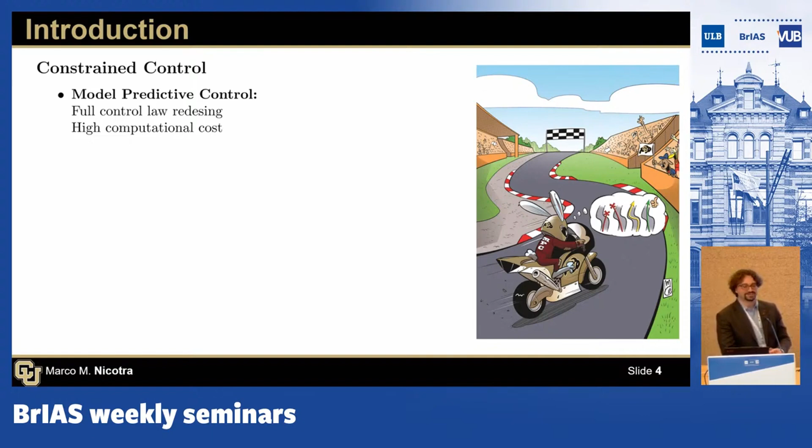So an alternative method to MPC are what are called safety filters. Safety filters are a broad family of constraint control laws where you keep an existing controller, so there's no need to go and redesign the system. A lot of industries have had their control law for years. They've tuned it to what they consider perfection, and they don't want to give it up. So the nice thing about safety filters is that they allow them to keep those control laws, and they tend to have a much lower computational cost compared to model predictive control because they don't need to solve a full nonlinear control problem.

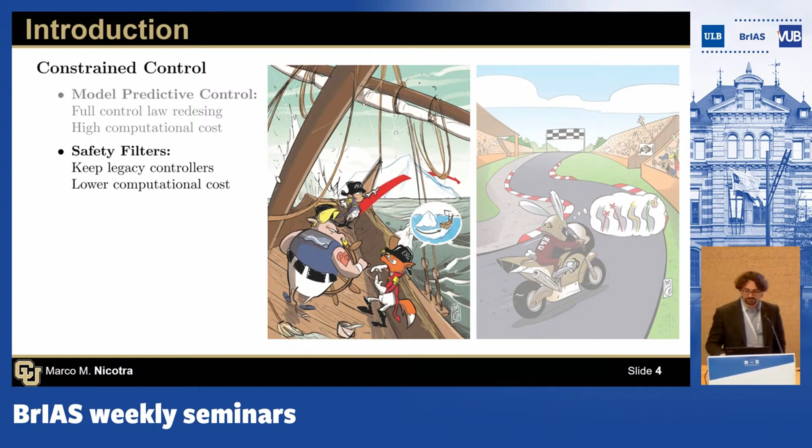I'm going to talk about a few different families of safety filters. The general idea is that first you design the control law for the unconstrained system, so you ignore constraints, design your controller, and then you introduce an add-on unit that enforces constraints a posteriori.

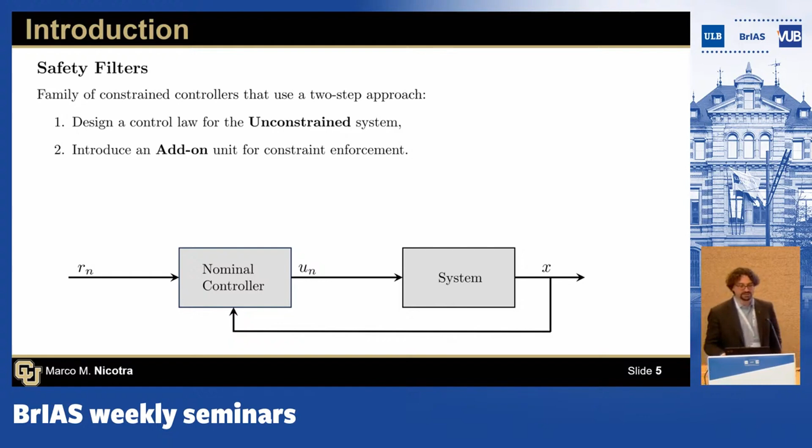Different kinds of safety filters will depend on where you place it. So control barrier functions are going to be a safety filter that is placed between your controller and your system, and so it filters the control input that goes to the system itself.

Whereas reference governors is instead a safety filter that is put on the reference of your control law. So in one case, you filter the reference and you allow your nominal controller to do its job. In the other case, you interrupt what the nominal controller is doing and modify the control law.

I'll briefly go through the general idea of both control barrier functions and reference governors, and then I will show how to mix the two to develop control barrier functions.

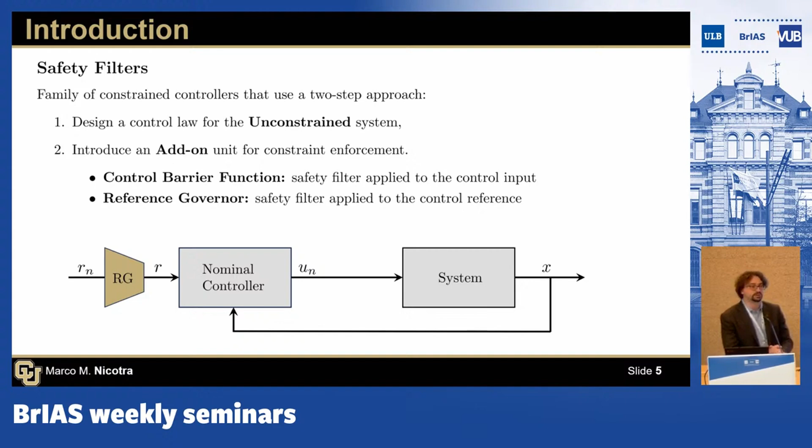Brief history on control barrier functions. They're actually relatively recent in terms of control schemes and control literature. The oldest paper that talks about control barrier functions in what is their modern conception is from 2014, but really the literature exploded around 2019. So we're talking about 5 years of control barrier functions being used and researched on.

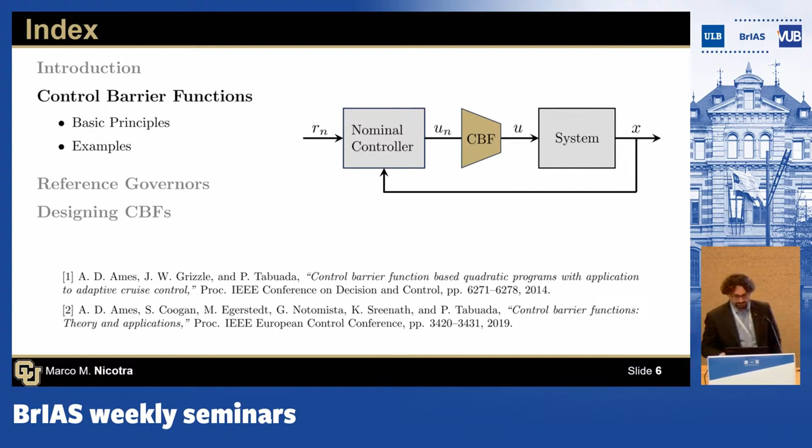So what are they all about? Well, we consider an affine continuous system, so the input enters your system linearly for a fixed x. And then we have state and input constraints, mathcal X, mathcal U. Our objective is to control the system while making sure that these constraints are satisfied.

And then there's a definition of a control barrier function that's just about as useful as the definition of a Lyapunov function. A continuously differentiable function h is a control barrier function if it satisfies two properties.

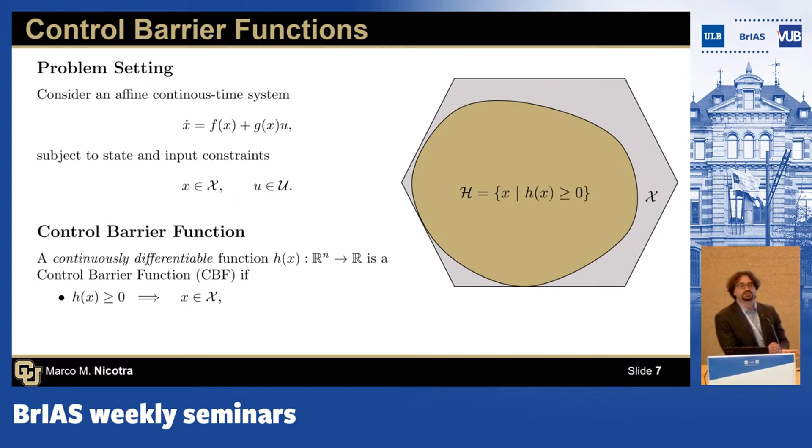First of all, if h of x is positive, then my state needs to be inside the constraints. It doesn't say anything about h being negative, violating constraints, that doesn't matter. But the point is, if it's greater or equal than 0, your constraints are satisfied.

And then the other requirement for control barrier functions is this: if h is positive, there exists a control admissible u that satisfies a long and ugly equation. So let's see what that means.

You have this nabla h, the gradient of your control barrier function. Let's put ourselves on the boundary of where h is equal to 0. Then the gradient is nothing else but the direction that points into my 0 level set.

And the second part of this is nothing more than x dot. So we're basically saying that the inner product between the direction in which h increases, so the direction where I go into my constraints, needs to be positive if h is 0.

And so here we have two cases. There's an x dot that points outside, and that's not allowed. There's an x dot that points inside, and that is perfectly allowed.

And then the question is, okay, why do we need this alpha of h on the right? Well, if we didn't have alpha of h, we could set this as sort of a subtangentiality condition, where you only care about what happens on the border, and then inside you say, okay, do whatever you want.

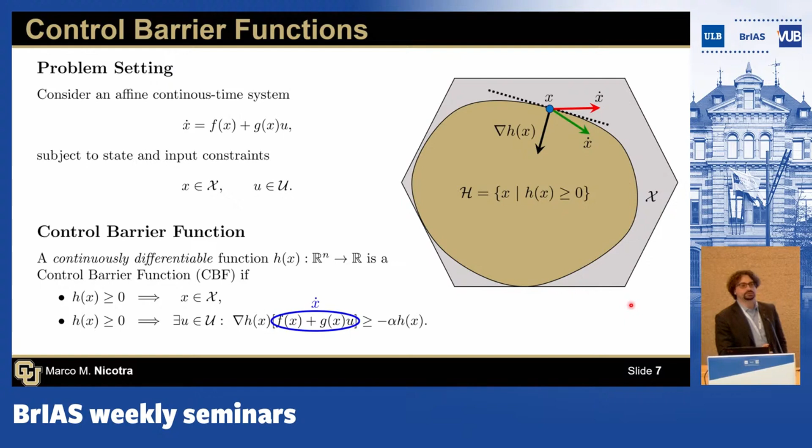And as I said, this is a very general definition of h of x, and it says if you satisfy these conditions, you have a control barrier function. And what do we do with this control barrier function?

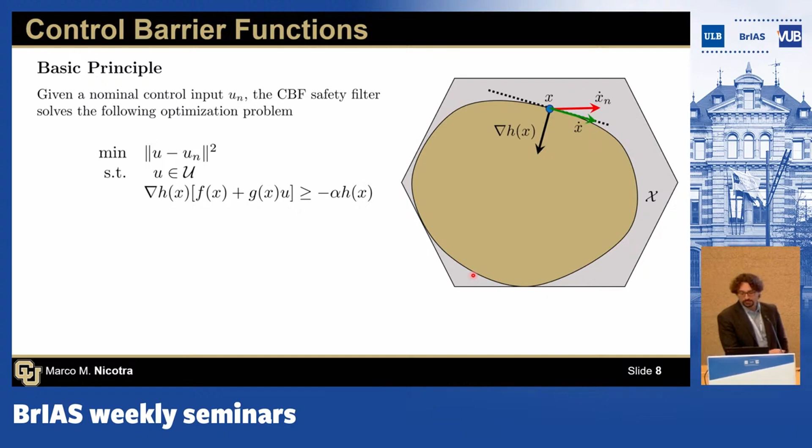And at every, well this is in continuous time, so we continuously solve this optimization problem, and we are guaranteed to be inside the constraints. So once again, if h of x is a CBF and its initial value is positive, then this optimization problem is always feasible. So it starts feasible, will always remain feasible in the future, and our control law ensures that constraints are satisfied. So this is the general pitch behind control barrier functions.

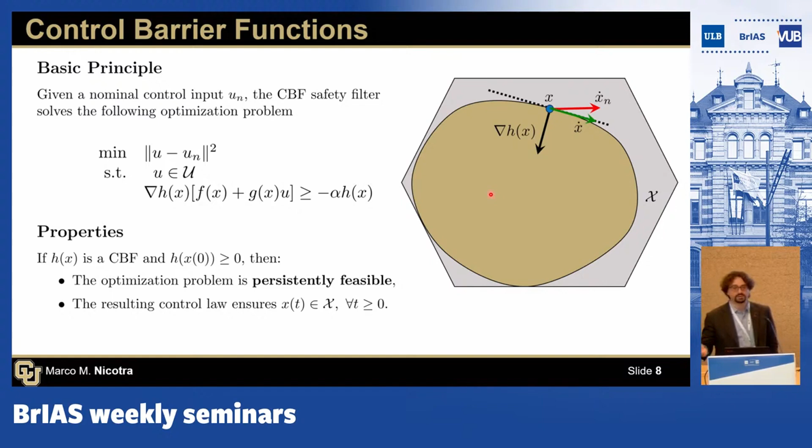And the truth is that they work pretty well, and they've been adapted for robotics quite a bit. So I'm going to go over a few examples of how control barrier functions work, how they can be implemented, and then what the pitfalls are.

Here we're going to have a simple obstacle avoidance problem. We're on a plane. X and u are both two-dimensional vectors, so we can move this point mass in whatever direction we want. We want to reach our reference, which is on the other side of the obstacle, while staying outside of a circular obstacle. So first, we design a nominal controller: proportional gain times r minus x. This control law would normally just go on the straight line between your initial condition and the reference.

Then, the biggest issue with control barrier functions is that we need to find a control barrier function for the system. And this is where people have problems, because there's no systematic way of generating control barrier functions. So typically people just propose candidate CBFs and sort of hope for the best that the properties are satisfied.

In this case, we can take a CBF as the distance between my current state and the constraints. This is basically the constraint: x transpose x minus 1 — if that's equal to 0, it means the norm of x is 1, and if that is positive, it means we're satisfying the constraints. So in a way, we take the constraint itself and say I'm going to use that as a control barrier function.

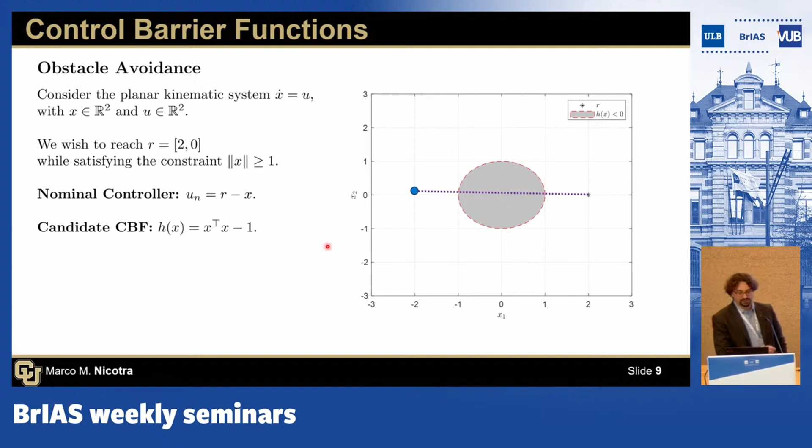And in this case, it does satisfy the properties — you can prove it. But in general, it might not.

And then the CBF filter looks nothing more than this: minimize the error between your control input and the nominal control input, subject to the derivative of the CBF being greater or equal than the value of the CBF times some scalar alpha. You solve this optimization problem, and you get a trajectory that goes around the obstacle and to the reference.

So I'll say that the one thing about CBFs, and I think the reason why CBFs have become so popular, is the fact that they are extremely intuitive and very easy to implement. You propose these things, and you have an optimization problem where the dimension is just the size of your input, as opposed to MPC, which also has the dimension of your state, dimension of your prediction horizon, etc. So this is a very light optimization problem, very simple to solve online, and you can get very good results without doing too much.

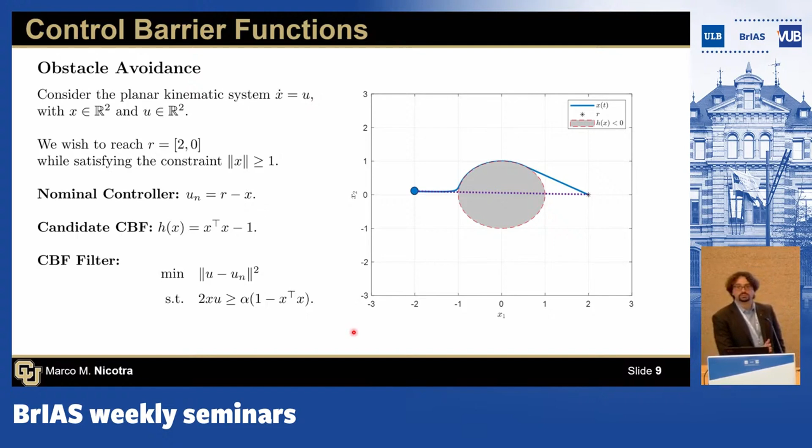All right, a slightly more interesting problem. These are two carts connected by a spring. You can do the same exact thing with an overhead crane — it's just a bit more annoying to get all the other parameters, so I'll keep it simple. But for those of you who are fans of overhead cranes, we have everything for that too.

Basically, we have these two carts of two different masses. They're connected by a spring, and the control input acts on the first cart. We're going to have a constraint on the second cart, and we also have a maximum input saturation constraint as well.

Now we go through the various steps of designing a CBF. We choose a nominal controller, which is a PD controller on the first cart. And if we implement that controller without changing anything, this is the behavior that our system will do.

I'm only plotting x2. You see that x2 goes over the constraint, and then the control input also hits saturation here and here. So the nominal controller was designed without taking into account constraints, and so it shouldn't be surprising that it violates them.

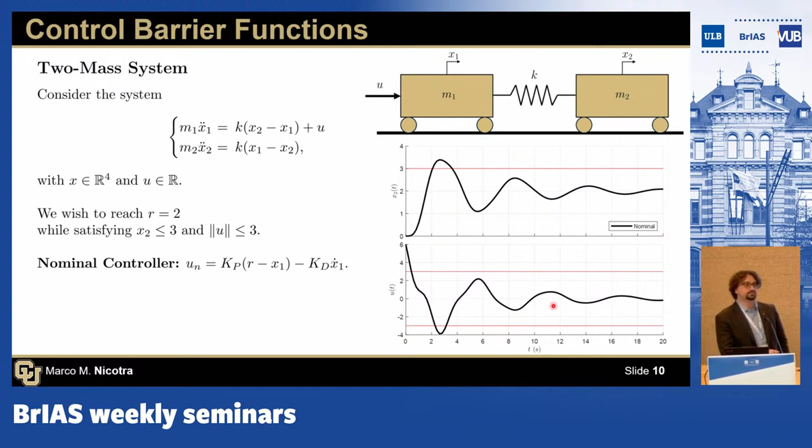And then once again, we need a CBF. As a candidate CBF, we're just going to take 3 minus x2, because I want x2 to be smaller than 3. And once again, I'll stress this is a candidate CBF — it means it satisfies the first property, that if it's positive, constraints are satisfied, but it might not satisfy the second property.

One thing I'll note is that when we compute the derivative of h, it's minus x2 dot, which doesn't depend on the control input. So already we've seen that if the affine system doesn't have a way for the control input to act on the system, then we're already in trouble — we can't use the CBF. Not to fear, this problem has been solved.

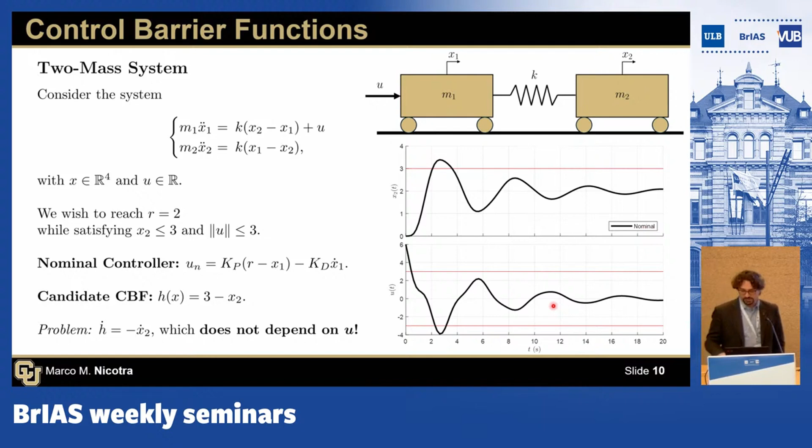So there's the exponential CBF approach, where basically you compute the derivative of your CBF until the control input comes in. If you think about it, this is a fourth order system where the control input influences the acceleration of this mass, and then the position of this mass influences the acceleration of the second mass. So there's a relative degree 4 before you see the control input acting on your system, and there's a slightly more complicated formulation for control barrier function that takes into account relative degree.

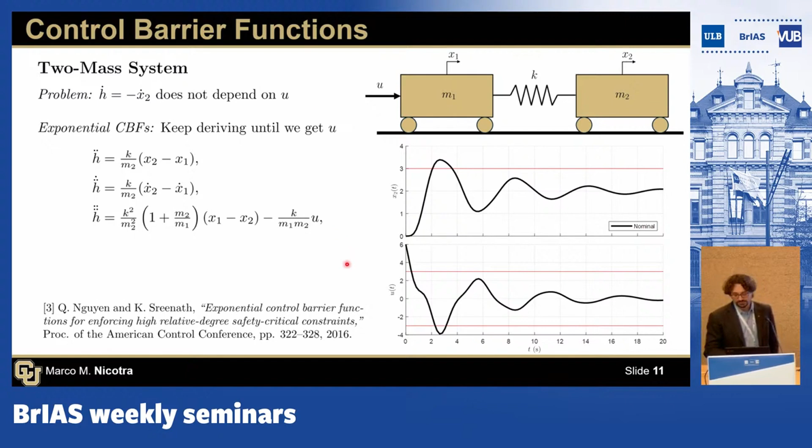And if you implement the CBF there, you get a control law that filters out what the control input should have been. And we get something that satisfies our input constraints and also satisfies our position constraints.

Great story. And I would say this is the reason why everybody goes to CBFs, is that it is very simple to implement. Unfortunately, we have no guarantees that the candidate CBF we chose is actually a CBF.

In particular, what happens is that for different initial conditions, we might have constraint violation. For example, for initial conditions at minus 13, we see that the carts go towards the constraints, and then the control input goes from an upper saturation, getting close to the constraints, you need to decelerate quickly, and you have a lower bound on your control input. So what happens here is that the CBF has put itself in a condition where it can't decelerate fast enough to avoid violating the constraints. So it either violates your position constraint or violates the control input constraint. It can't satisfy both, and it just fails.

Yes, with tuning, you can get it to work on this particular example, but then you can take another initial condition and violate it anyways. So the point is, sure, it works, and if you are in a confined space, you can tune it in a way that everything works. But we want something that's a bit more systematic than just taking distance to constraint and tuning things until they work.

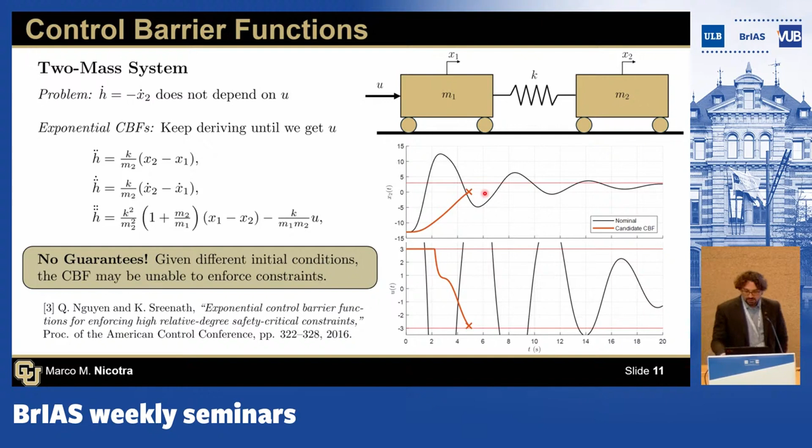Which brings us back to a different literature, which is reference governors. Reference governors, Manuel might correct me on this, but I think they were first formulated around 1995, slightly earlier for invariant sets, but this is the first time I saw the word reference governor. In any case, 30 plus years of history, and there are proven stability and safety results for it.

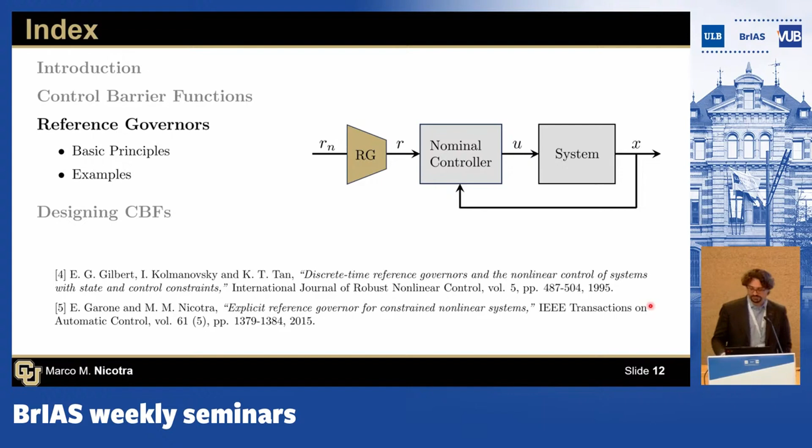And then there is this paper from 2015 that you might recognize the authors of. This is the work that I did while I was a PhD student here. Basically, we formulated the reference governor for continuous time systems, and we use nonlinear systems theory to enforce constraints. So I'm going to go a little bit into the theory of explicit reference governors because it's going to be needed afterwards.

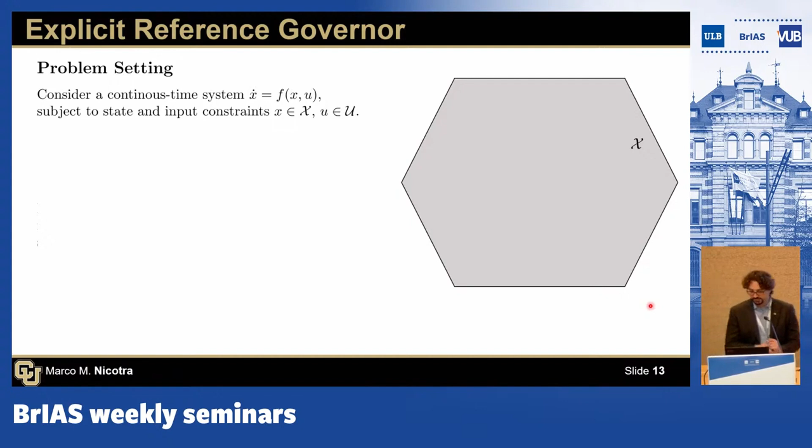Kind of the same setting. We have x dot equals f of x, u, not necessarily affine, but this is more general. Again, we have state and input constraints. And for this particular system, we are going to parameterize the equilibrium manifold. So we assume that this system has multiple possible equilibrium points, and those equilibrium points can be parameterized by this variable v. And x bar of v is a possible equilibrium point for the system.

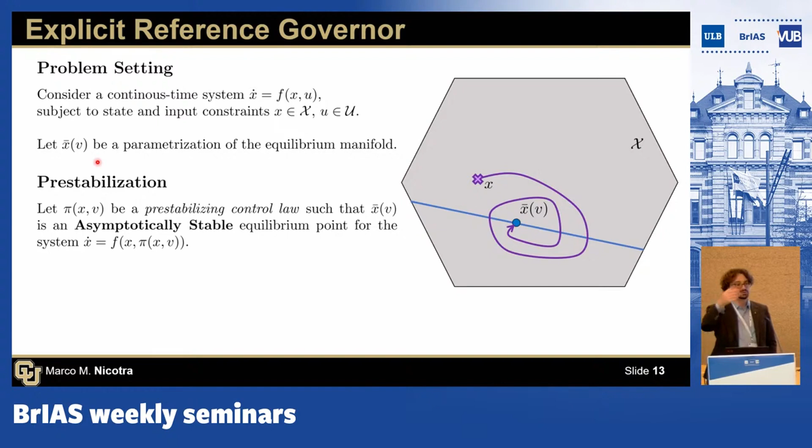Well, if we have a possible equilibrium point, we can design a control law that brings our system from x to an equilibrium point, and we call that a pre-stabilizing control law. So we start from a state x, and the pre-stabilizing controller leads me to my target equilibrium point. The nice thing is that if we have input constraints, those input constraints can be translated into state constraints, because now we have a pre-stabilizing controller, so we have a mapping that goes from state to input, and that allows us to reformulate our input constraints as state constraints.

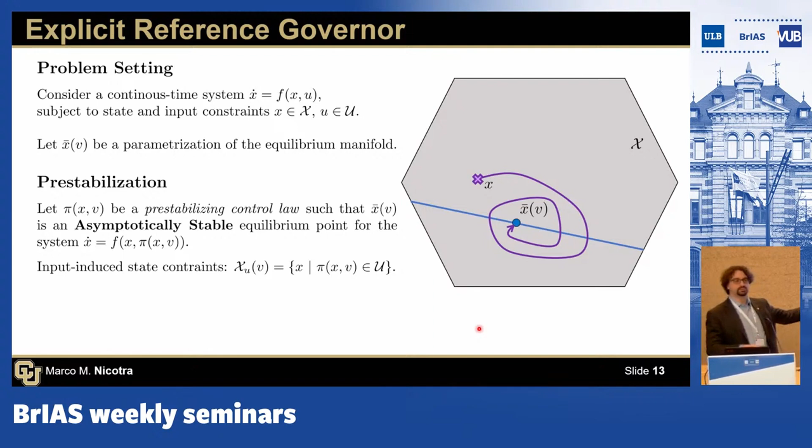And then how do we know whether the trajectory is going to violate constraints? Because right now we're not enforcing anything. Well, we can always say that the trajectory is contained inside the level sets of a Lyapunov function. Here I don't care necessarily what the trajectory will do. I just note that there's a Lyapunov function associated to my current state. And there is a Lyapunov level set that is going to touch my constraint.

So if you think about it this way, gamma of v is a distance between my reference and the boundary of my constraints, but sort of using the Lyapunov function as a norm. So we're saying, okay, for this given reference v, what is the largest Lyapunov level set that I can have that doesn't go outside of the constraints? And it's fairly clear that if the value of the Lyapunov function is smaller than the Lyapunov threshold value, then you cannot violate constraints, because the Lyapunov function is destined to decrease, gamma stays the same, and so this value is going to increase as long as v remains constant.

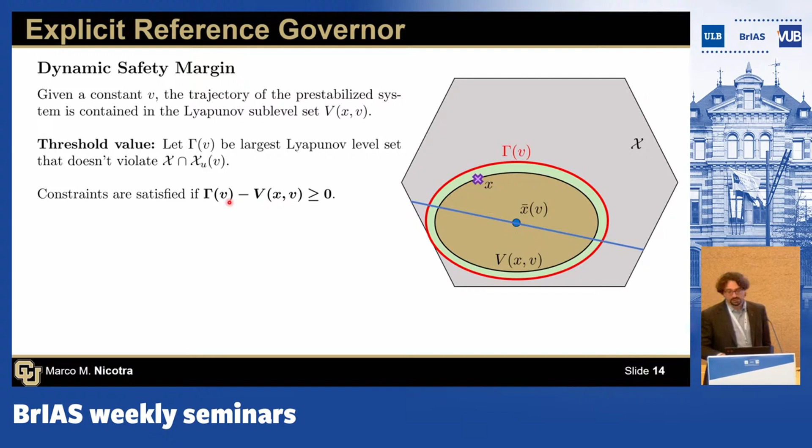So that brings us to what the ERG looks like. The ERG, we manipulate this auxiliary reference V because that might not be the equilibrium we want to go to. So we say V dot is proportional to this error. When the Lyapunov function equals the threshold value, we stop and wait for the Lyapunov function to decrease.

When it's strictly positive, it means it's safe for my reference to move. This rho is the direction in which I want my reference to move. Where should it go? Ideally we have an actual reference we want to go to. So rho is just a vector that points from my current virtual reference to my actual target.

And we can show that by simply manipulating the derivative of this fake reference, we can get a control law that guarantees safety and asymptotic stability.

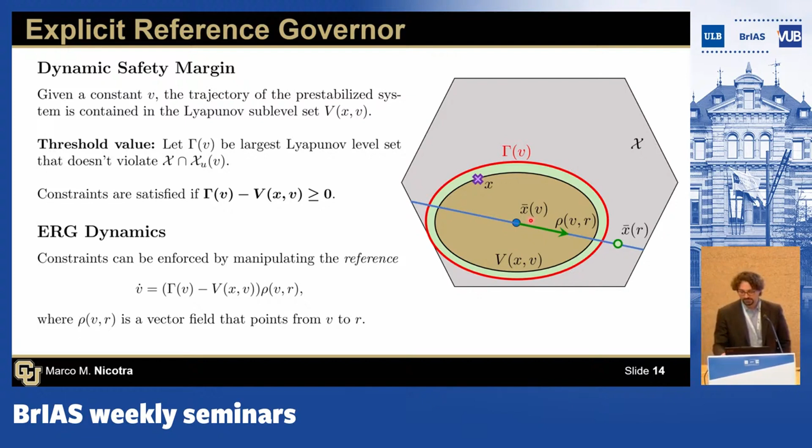So what does this look like for our example? Once again, nominal controller, PD control law on the position of the first cart. And what is the Lyapunov function for this? It is the total energy of the two-cart system, where we also assume that this Kp is a virtual spring. So the Lyapunov function is the kinetic energy of the first cart, kinetic energy of the second cart, a spring connecting the two carts, and then this virtual spring connecting x1 to my reference V. So I know that if V stays constant, this function is time decreasing.

Now I need to express my constraints as constraints on the Lyapunov function, not constraints on the state. I'll skip over this. The first one is our input constraint.

Your control law is a linear constraint, your Lyapunov function is an ellipsoid. You can calculate the intersection between an ellipsoid and a planar constraint, and this is the result for it. It's not too exciting, but the solution is there, and you can calculate it closed form.

A little bit more interesting is the second constraint. This is the constraint associated with wanting x2 to be smaller than 3. What happens here is I have a system with a reference V and a virtual spring Kp that connects the reference V to mass 1. Then I have a real spring that connects mass 1 to mass 2. So mass 2 sees a series of two springs that connects it to V.

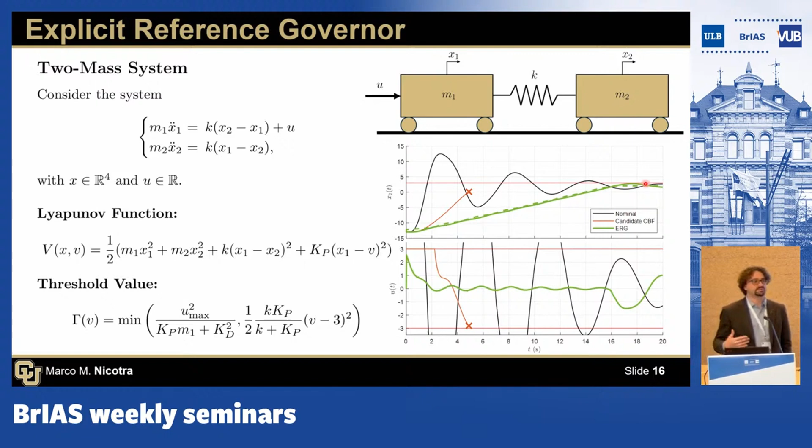The idea here is, well, we have CBFs that have been shown to achieve fairly good performance when they work, but don't have guarantees that they will work. And then we have the ERG, which has guarantees that it will guarantee safety, but the performance tends to be hit or miss. So I can finally get to the main focus of this talk, which is how do we combine reference governors and CBFs so we can design a CBF that is guaranteed to enforce constraints.

The results I'm presenting are from a paper that has been submitted to TAC. And if you're a reviewer, please accept it.

Just wanted to give you a little sneak peek at this result that I'm very excited about.

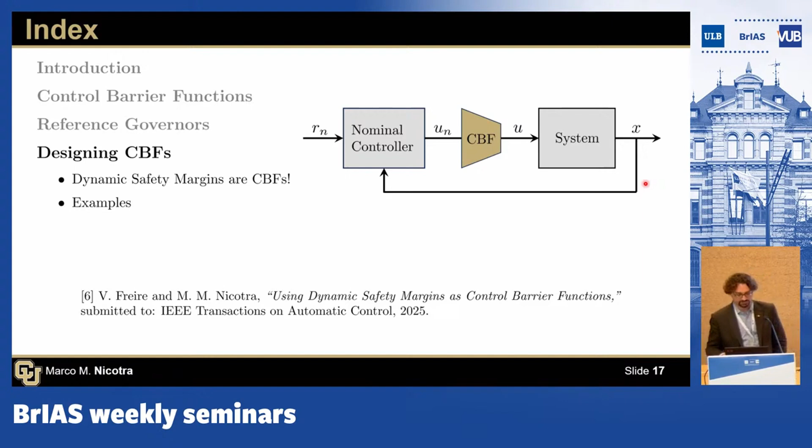Going back to the context, we need to take the most restrictive of the two between CBFs and ERG. So we're back to that affine dynamics. It's not a general f of x,u, it's just f of x plus g(x) of u. The main reason for this is to guarantee that the solution of your optimization problem is Lipschitz continuous.

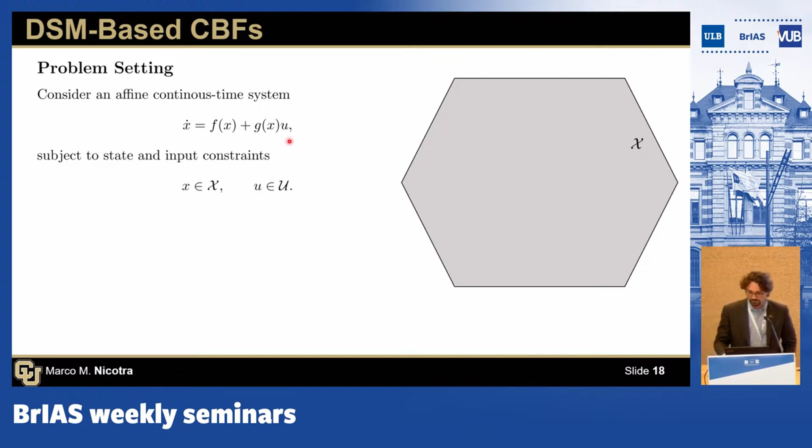Since we've done our homework on the reference governor side, we know that we can define this dynamic safety margin, which is nothing more than the threshold value for a given reference v minus the current value of the Lyapunov function for that particular reference v.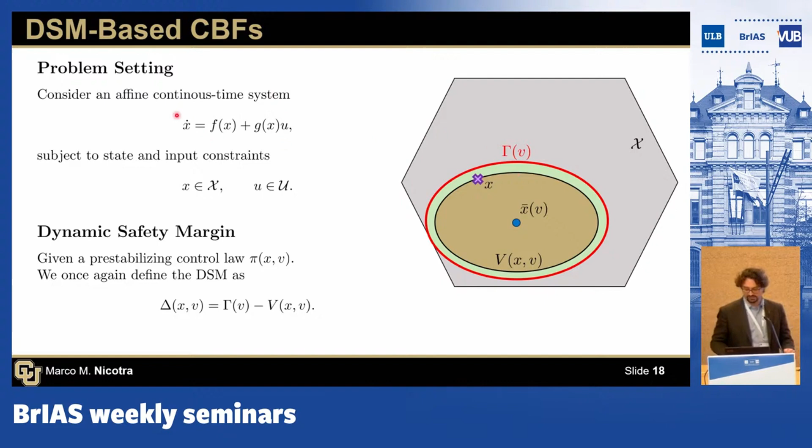What we are going to do is extend the system. So rather than studying just the dynamics of x dot, we're going to study the dynamics of my system and this virtual reference. The system satisfies my normal dynamics. The virtual reference, its derivative is equal to rho, because I get to choose the derivative to be however I want. And what we're going to do is apply the CBF optimization problem to this extended system, which is state and virtual input.

And so the optimization problem looks something like this. You need now a nominal direction for your reference to go, but that's not too hard to get. So we are solving over u and rho, and we're trying to minimize the error between our control input and the nominal control input, as before, and then possibly the error between the direction in which our applied reference goes and a nominal direction.

This epsilon can technically be 0, but when it's 0, the problem's not strongly convex. So we do like to keep it small but non-zero. But the theory works even if this is 0.

Rest of the constraints: the control input needs to be inside my input constraints. And then this is nothing more than what we had before—the gradient of delta times x dot plus the gradient with respect to v times v dot, and that's greater or equal than minus alpha times delta.

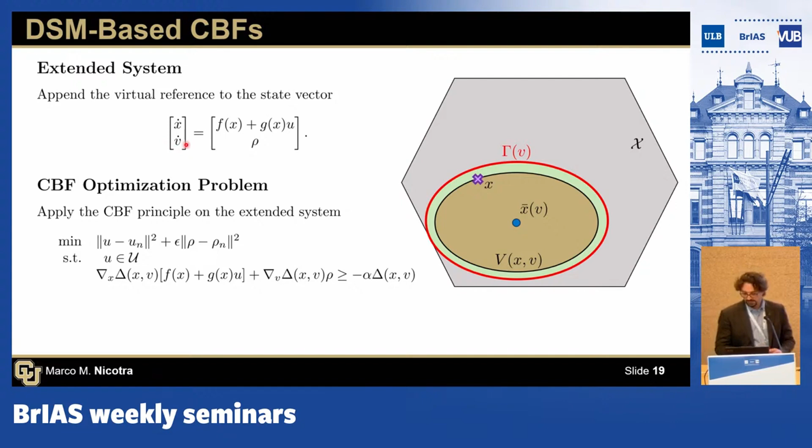So what we're doing is using this dynamic safety margin as a control barrier function for a system that has extra states in the form of this applied reference. The nice thing is that this particular optimization problem always has a feasible solution. That solution is: don't do anything with the reference, keep it still, and apply the pre-stabilizing controller to your system. If that happens, your x will follow that predetermined trajectory, which means v will decrease, which means everything will work.

Nice thing here, we don't care about relative degree of our system. Basically, if for any point we have one of these go to 0, we can actually prove that the natural dynamics of our closed loop system work.

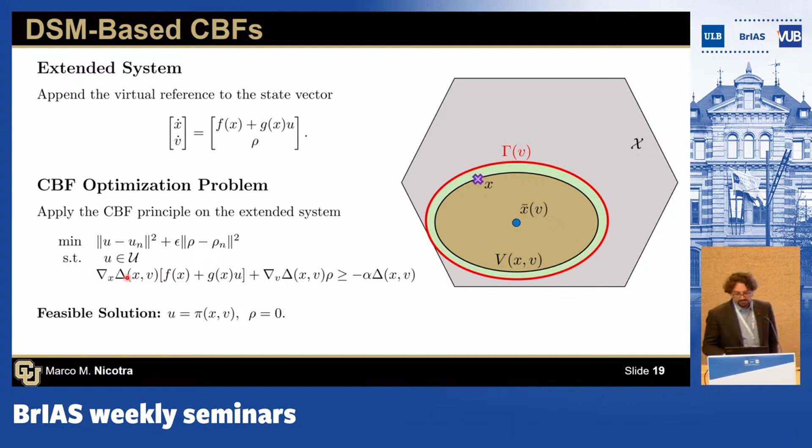Okay, so that's the optimization problem. Going back to our favorite example, same Lyapunov function, same threshold value. The point of this is to say that everything that we've learned how to do on explicit reference governors can be ported into the CBF literature with no changes.

And then once we apply the CBF, we get something like this. Here, the measure of performance of a CBF, due to how the optimization problem is formulated, is how closely it follows the nominal trajectory. You can see that the dynamic safety margin-based CBF follows the nominal trajectory pretty closely, and then also stabilizes and doesn't violate constraints.

The interesting thing to look at here is this applied reference, which isn't applied to anything—it's just a backup reference for our control law. The controller knows at this time that if it were to give a reference that's very far away from the constraints, then it's safe. So it keeps in its pocket this knowledge that it is safe now, because at any given time it can give a reference that's way back there, and by doing that it's going to satisfy its constraints.

And then we apply it to the longer step, and we get something that looks like this. It's actually doing almost exactly what the candidate CBF wanted to do. So input is fully saturated at the beginning, and the interesting part is that it saturates a little bit longer after.

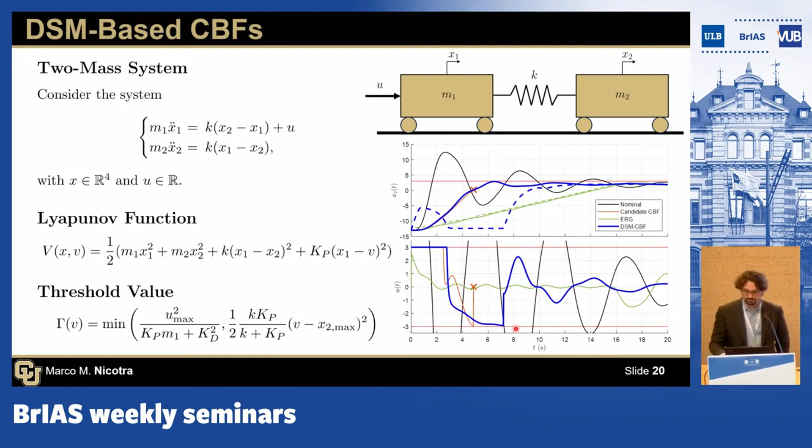Brief overlook of what we've seen. We're proposing a method to design CBFs in a systematic manner.

The steps for this: you take your system and first define a pre-stabilizing controller that stabilizes it to a generic reference, any steady state admissible equilibrium point.

It's interesting to note, and we've used this quite a lot, that the pre-stabilizing control law doesn't need to be the same as the nominal controller that we then optimize against. In fact, we've seen that the best performance is obtained by having a very aggressive nominal controller, but a very slow and relaxed pre-stabilizing controller.

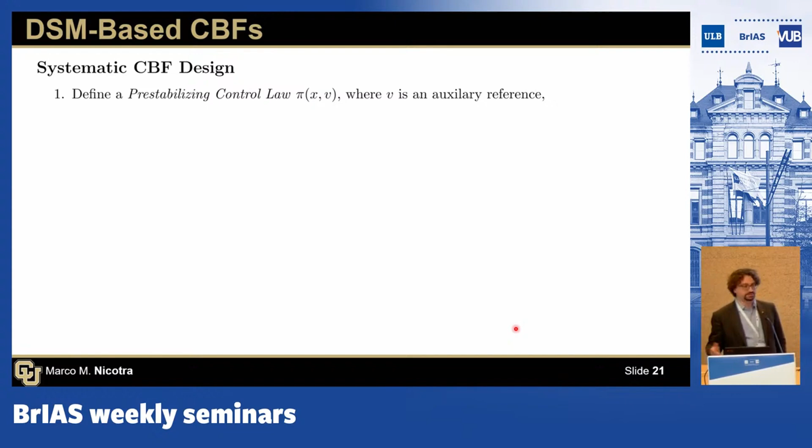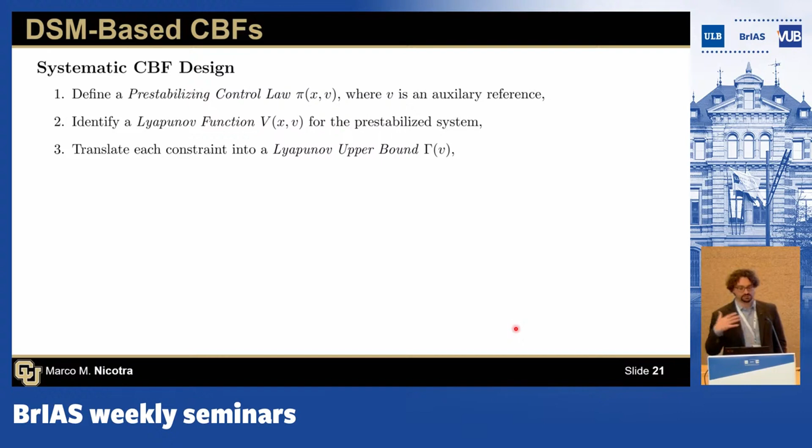Once you've defined the pre-stabilizing controller, you need to find the Lyapunov function for the pre-stabilized system, and translate every constraint into a constraint on the Lyapunov function. We've proven that the difference between the threshold value and the Lyapunov function is a control barrier function.

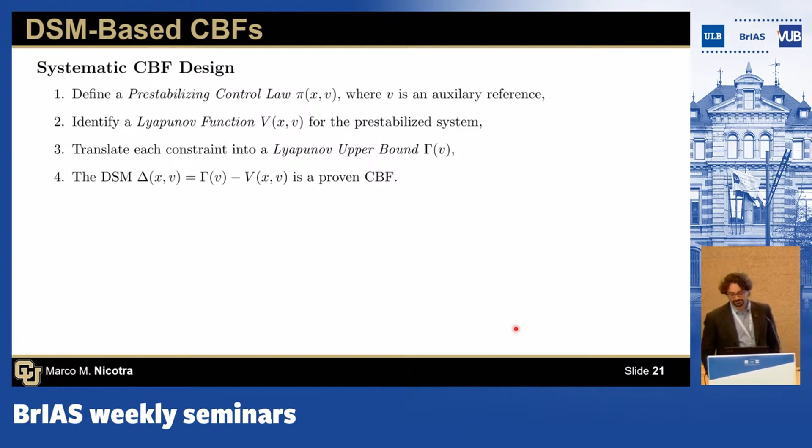Properties that we've been able to prove: the optimization problem is persistently feasible. The relative degree doesn't matter, which is nice for people who have worked in control barrier functions, because most of the literature assumes relative degree 1, and then you need to go into exponential CBFs for anything higher than that. Here we're saying it doesn't matter, it works, because basically this gamma minus v will always have a relative degree 1. And then it satisfies constraint sharing properties.

So far I've only talked about having one constraint, but if you have multiple constraints, your optimization problem becomes more complicated and it becomes more likely that the solution doesn't exist. For CBFs, we can prove that as long as you use the same pre-stabilizing controller to compute all your dynamic safety margins, then you have the constraint sharing property, and you can add constraints without any worries.

I do have time, I think. Do I?

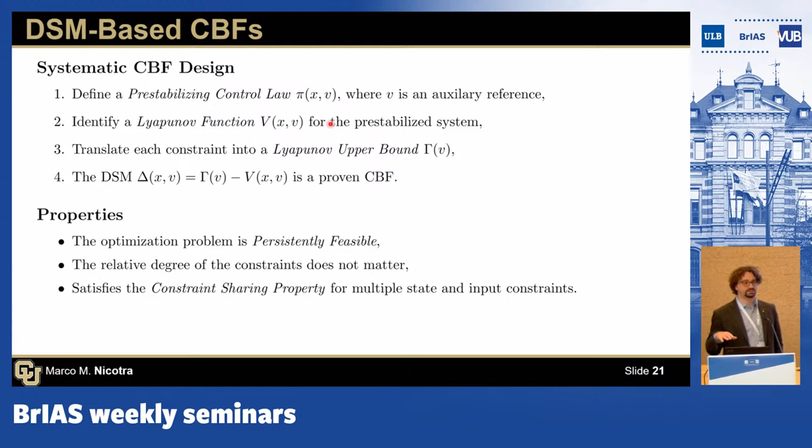So I'll go into another example where I wanted to show that the fault for the constraint violation wasn't that the relative degree was so high. So I have a system with relative degree 1, you technically have enough control authority to get everything to work, and CBFs can still fail if they're poorly designed.

So I have this nonlinear system where the first order terms are asymptotically stable, but then I have an unstable cubic term. So what this means is that if I stay close to the origin, the system tends to come back. And if I get far enough from the origin, the cubic terms will overpower the linear terms and the system goes unstable.

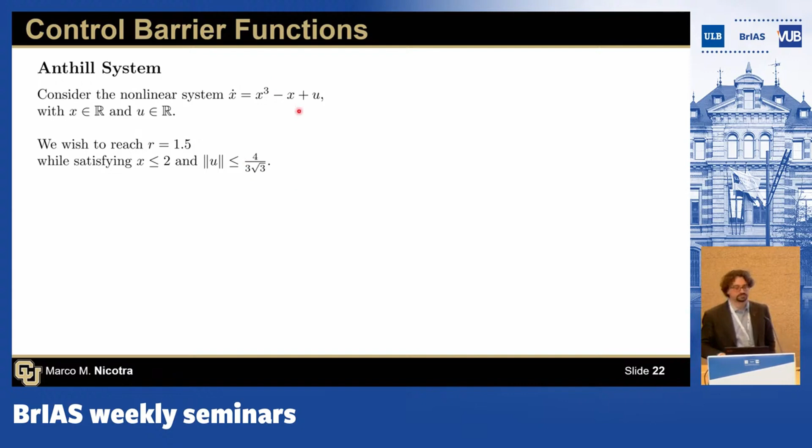And here we want to reach r equals 1.5 while satisfying constraints on x and input constraints on u. These are chosen weirdly because that helps me solve the cubic plot, but it doesn't really matter.

We define a nominal controller. Here we're doing what in robotics would be called anti-gravity compensation. So we're just computing what our steady state would be and enforcing a control input that is a constant plus something that multiplies my error.

And with this controller, we get something like this. So we go from 0.5 to 1.5 without any overshoot. So the x constraint is not even a question. And our control input definitely violates our saturation constraints.

With the CBF filter, we're going to use our constraint as a control candidate CBF, and the system looks like this. So what happens is that it tries to go towards its target. And at a certain point, when the control input saturates, unfortunately the cubic term is overpowering both the linear term and the saturated input. And so the system goes unstable.

The interesting part here is that it doesn't really matter what my x constraint is. As long as I have a constraint, it will be violated. If I had a constraint x less than or equal to 200, it would also be violated. Basically, we've excited an instability of the system, and now whatever our constraint is, we can't satisfy it.

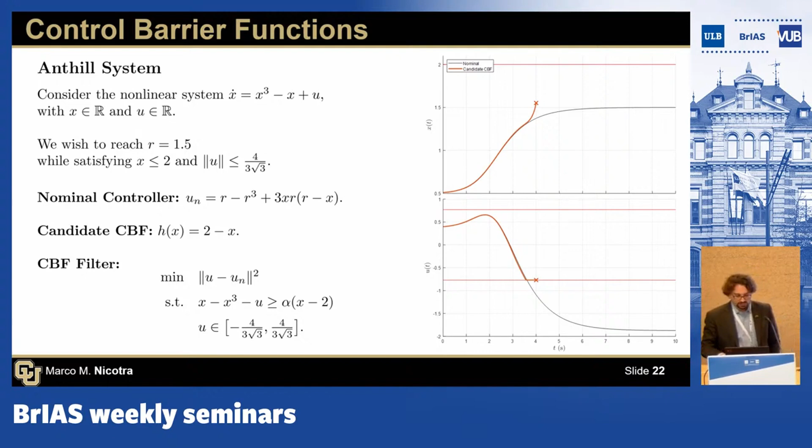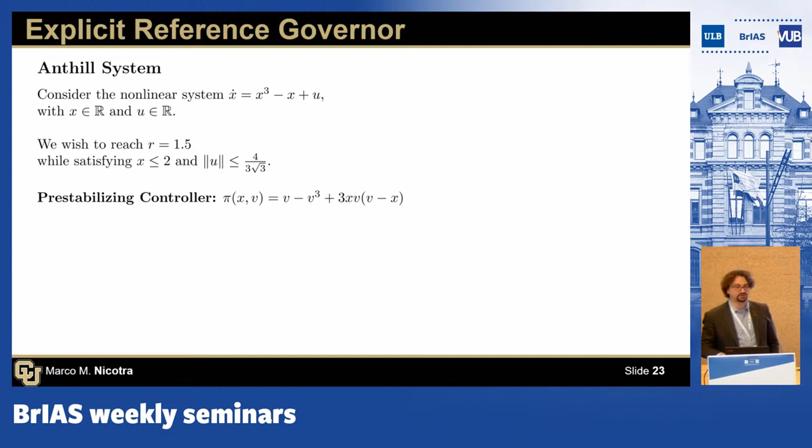We can implement an explicit reference governor, usual things, pre-stabilizing controller. This is why I call it the anthill system, because the Lyapunov function looks like an anthill.

You see you have two peaks, and basically if you're on the outside of these peaks, you become unstable. If you're on the inside of these peaks, your control is asymptotically stable. So we have a natural constraint on our pre-stabilizing system, which is that we want the Lyapunov function to be less than the value at that peak. And if we enforce that, we guarantee that our pre-stabilizing controller is always stable.

And then if we have other constraints, for example, I want x to be greater than or equal to 0, then we can take the value of the Lyapunov function at that point, and we get a threshold value.

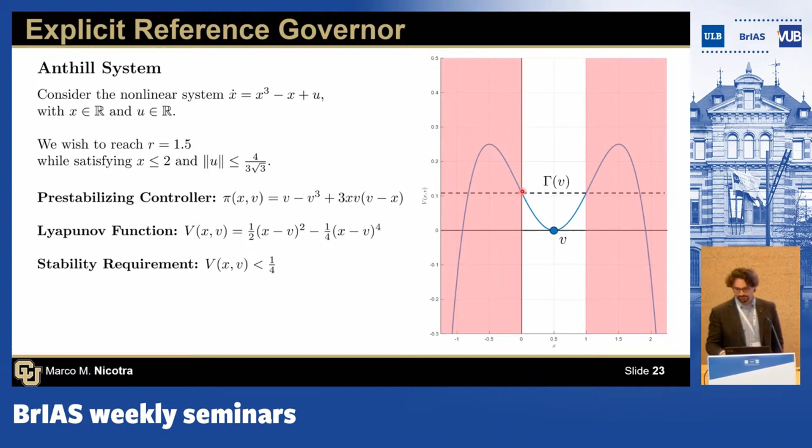So we translate everything into constraints. I'll skip over, but basically the idea is that this is what the ERG comes out to be, and we can compute the threshold value in closed form.

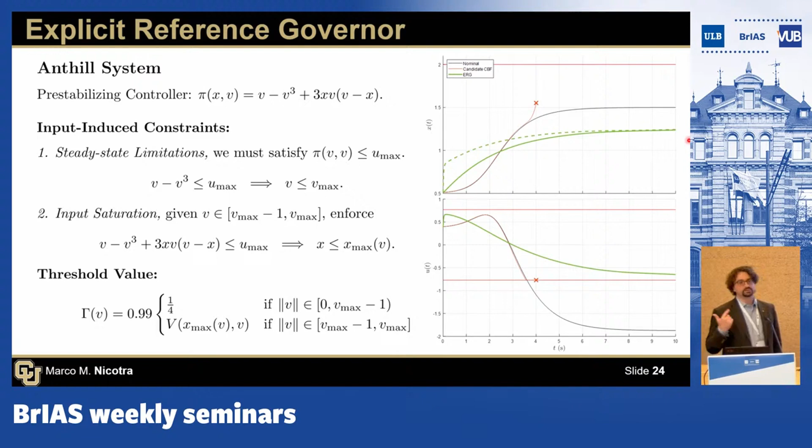And once again, we are safe, but we might be slow. And then we use the same exact dynamic safety margin for our CBF, and we get something that looks like this. So it follows our target dynamics exactly until it realizes that there's a lower bound on U. I can't go any further, and so it just kind of stops moving, and it reaches the point that is as close as possible to our target.

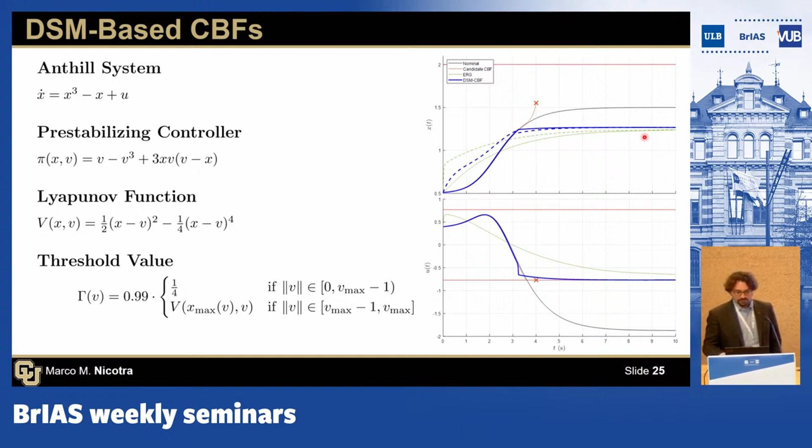While not getting the system unstable. All right, with that, I'd like to thank you for listening and my PhD student for doing all the work that I presented. Everything, like I said, is on a TAC paper that's been submitted, but if you're interested, you can go on arXiv and take a look. All right, thank you.

So, questions? It was so clear.

So you have always assumed that you have kind of... do you need a perfect model of your system? How can you cope with modeling uncertainties there? Any issue regarding that? And is there a difference between barrier functions and ERG in that respect?

I don't think there are issues between barrier functions and ERG in that respect. So how we handle these uncertainties on the ERG side is we can overestimate this Lyapunov level set. You say, okay, well, my system has parameters that are unknown, but those parameters are in this range. And so then you can basically provide a Lyapunov function that takes the worst case Lyapunov function and the worst case threshold value for the two, and then the ERG works.